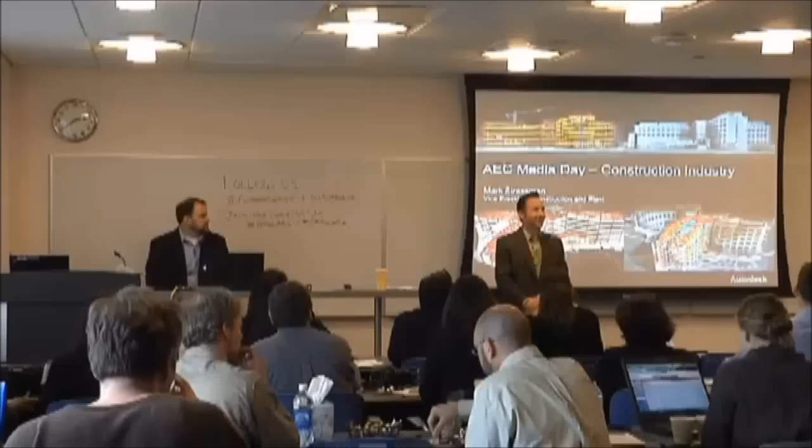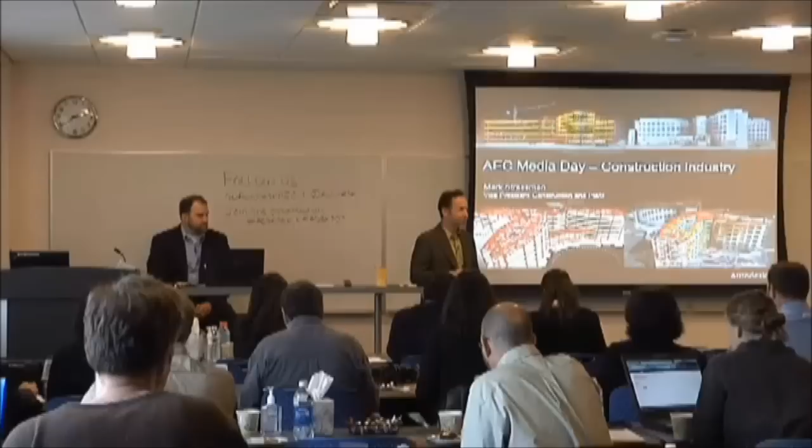Thanks, Brett. My name is Mark Strassman. I head up our plant and construction groups. Some of you know me from 8 or 9 years back when I was in charge of the AutoCAD business. 4 or 5 years ago, we broke off a separate group to focus on plant.

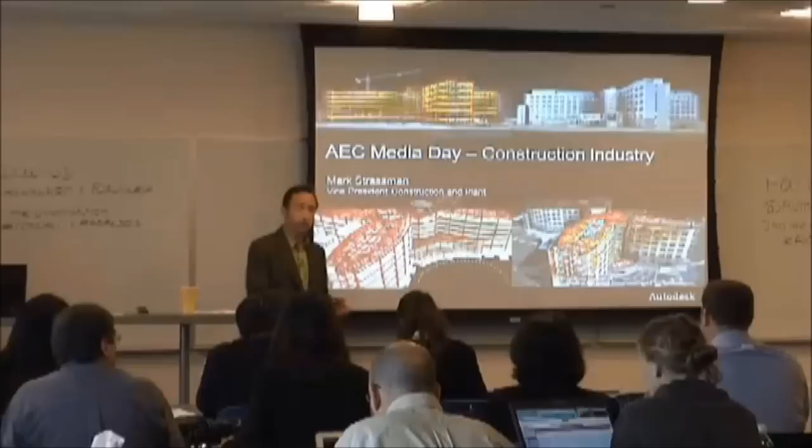Just this past year, we broke off a whole separate group to focus on construction. So not going to be talking about plant today. We're not launching the new 2012 plant products this quarter, but we'll be launching those soon and talk to you about those then. So today, focusing on construction. Also have Scott Johnson up here, who's going to be showing some of the products.

First, I want to talk a little bit about the construction market. You've heard about it today from Jay, you've heard about it from Jim, you're going to hear about it from me. I figure as you're heading down right before the sugar hits you, I'm going to get you as the sugar's rising before you plummet again for the end of the day. So, as you can tell, we're very serious about construction.

It's a really interesting market in a bunch of ways. It's a big market undergoing a lot of transformations, and there's a lot of new technologies really addressing some of these transformations. Construction accounts for about 10% of the world GDP. Just an enormous market, a lot of money being spent there.

At the same time, of that 10% of GDP, about 30% of construction costs are attributed to waste. That's just the way it is. It's the way construction jobs have been planned for a long time. The wrong materials show up at the wrong time, there are clashes, and you have to order different materials. Subcontractors sit on site waiting for materials to show up, and you have to change your whole schedule. So waste is just part of the process. But again, 10% of the world's economy, 30% of that is waste—a huge opportunity to get more productivity and more profits.

A big change going on now is contractors are really leading the value chain. It used to always start with designers, passed over the wall through engineers to the construction process. The recession has really changed a lot—consolidation, design-build firms. Contractors are now starting to raise bonds, fund these projects, public-private partnerships. So contractors are leading the value chain in a way they never did before, making this 30% waste particularly acute.

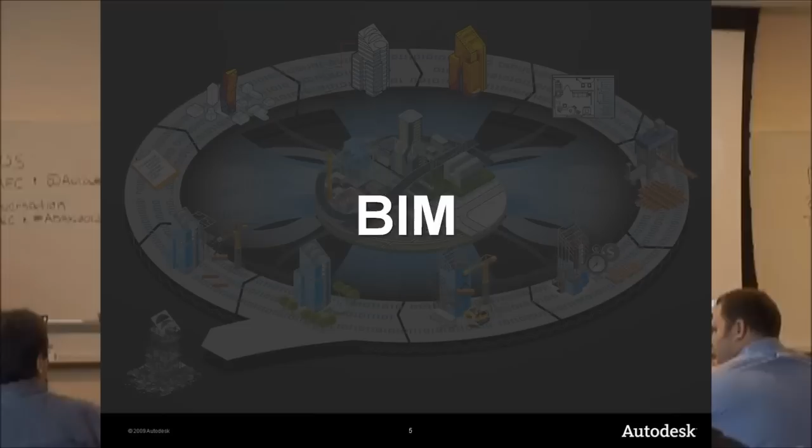That said, some technologies are really addressing this 30% waste in a way they haven't before. All day you've heard about BIM, the building information model. It's not just about design, it's about extending beyond design. The real beneficiaries of all this information in the building information model are the contractors. The cloud—having all this building information in the cloud, as opposed to trapped on a desktop or a server in someone's office—gives accessibility in the field to the contractor in a way they never have before.

And then mobile—every contractor in the field has a device. I met with a contractor a couple weeks ago. They said, I was on a job site, I needed to find information about a change going on in the project. One of my subs brought it up right on his device. We didn't have access to that—we had to go down to the shop, get our huge paper documents that weren't up to date, and it took an hour and a half to find it. We need access to the information in the field. So mobile devices, BIM, and the cloud give access to the things contractors care about in a way they've never had before.

What they really care about is cost, schedule, and constructability—how it all goes together. Schedule is what comes after what, how long it takes to build, and that all affects the cost. So BIM, cloud, and mobile allow access to all of these in a way they never have before. That's what we're really focused on.

This is really the mission of my group. It's about allowing contractors to win projects with a lot more predictability, cutting out the waste, and a lot less risk. I met with a contractor recently who said, you know why they call us contractors, right? I said, well, actually, no, I hadn't thought about it. They manage all the contracts to get the building built to reduce risk. So they really see themselves as risk mitigators, and BIM gives them insight into that.

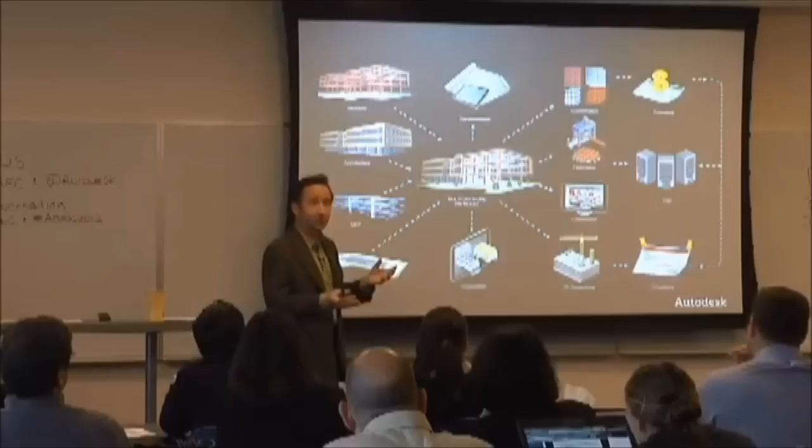So a bit of an eye chart here, but this is one way we look at BIM. You have structure, architecture, MEP, civil, all going into a multidisciplined BIM model. Out of that model, you can get your documentation, do visualization, do quantification, counting things in the model that can go into estimating systems. You can use that model for fabrication, choosing what areas you want to fabricate and go into a fabrication process. You can use it for coordination, how the different disciplines come together, where clashes are.

You can start doing 4D sequencing, time, what comes after what in the whole process. That can hook up to your scheduling systems, and all of this hooks into the back-end systems. Construction companies are more and more of a manufacturing process, so hooking into the ERP systems, knowing the specifications, the schedules, the materials.

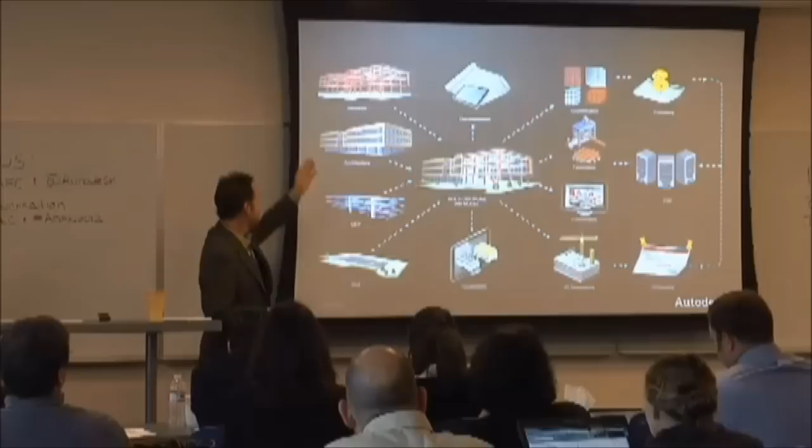It wasn't long ago that people really thought about Autodesk, especially in AEC, really as the design space, right? We have the design products for structure, for architecture, for MEP. And you saw today all of the new features in our various design products. Revit Architecture, Revit Structure, Revit MEP, Civil 3D, all the things they do to give more insight into the building process.

Several years ago, we introduced Navisworks, allowing customers to bring together all the different disciplines, not just from different Autodesk design tools but from dozens, supporting dozens of formats. From that, offering visualization out of Max.

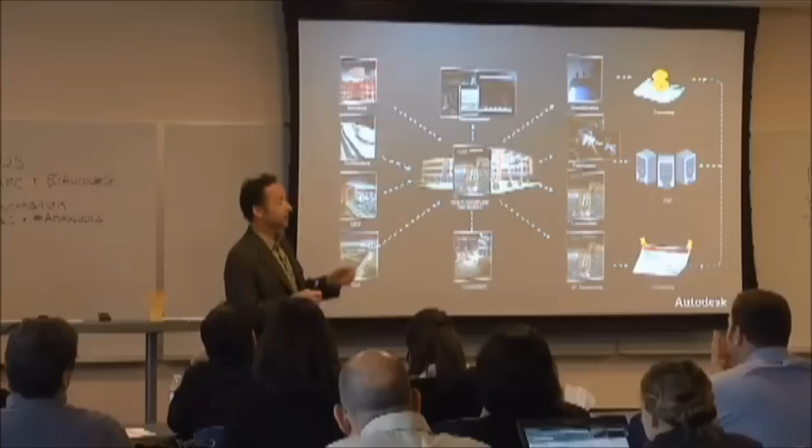Documentation. You saw today some looks at AutoCAD WS, so being able to, in the field, look at the 2D documents. Quantification. Last year we introduced Autodesk QTO, quantity takeoff, so counting things, hooking into estimation systems.

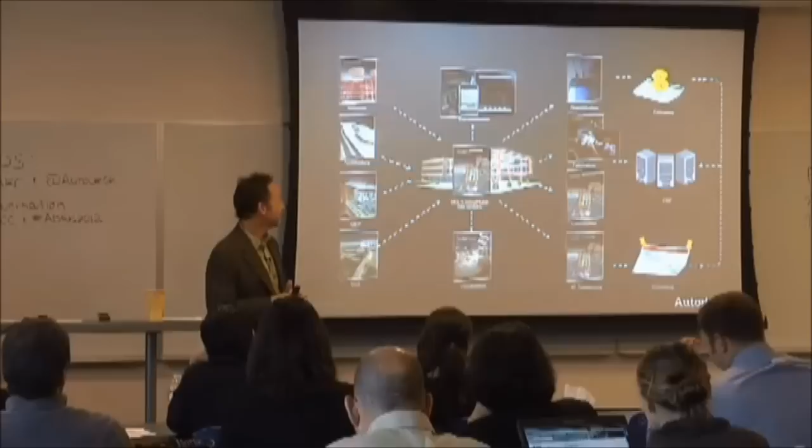We're seeing a lot of customers use Inventor for fabrication, and Inventor Publisher Mobile for on-site instructions on how things go together. Coordination and 4D sequencing also done in Navisworks. So this is really about, in construction, extending BIM beyond design.

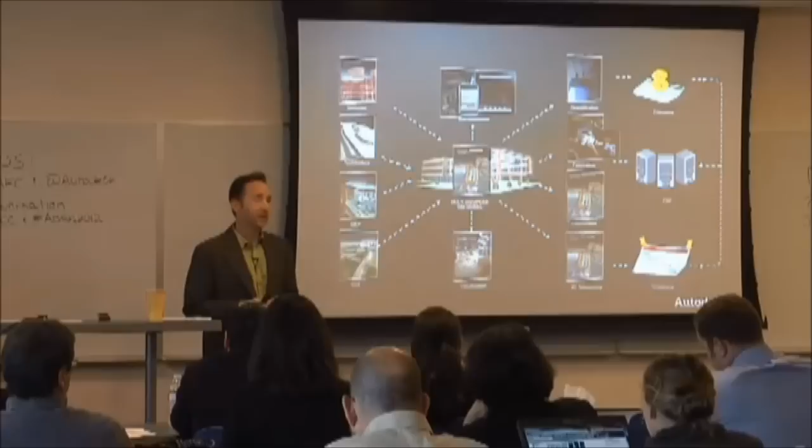We think we've got great design tools in this space, and we're really pushing BIM further and further there, but taking it beyond design. The contractors don't really care about the design. They care about the information and all the information they can get out of this model for quantification, fabrication, coordination, and so forth.

And guess what? All of these products, you knew you'd hear about suites again, right? They're all in the suite. So we have Navisworks Manage, AutoCAD, Revit Family. This is the ultimate suite that Jim showed you about, and this addresses all the different parts of the construction process.

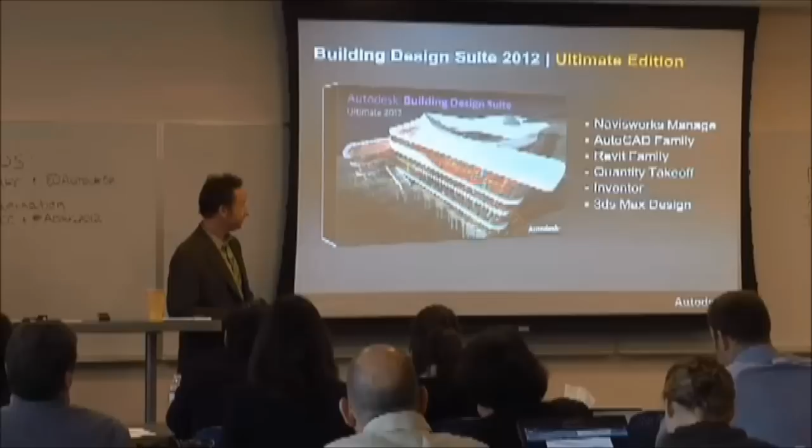Things that aren't in the suite that are part of the construction process include Vault, Buzzsaw, and Constructware for data management through construction management. All important parts of the process.

So given that, I'm going to go just a little bit overview about some of the features in some of these products, and then Scott is going to go and give you a full demo.

So construction modeling, you've heard about that a lot today. I heard about Revit with a division of objects and assemblies for greater level of detail for construction. The way the architect might design a model doesn't care about where the studs are or how many square feet of concrete you need. That's the sort of thing that the BIM groups and the contractors are starting to put this level of detail in there.

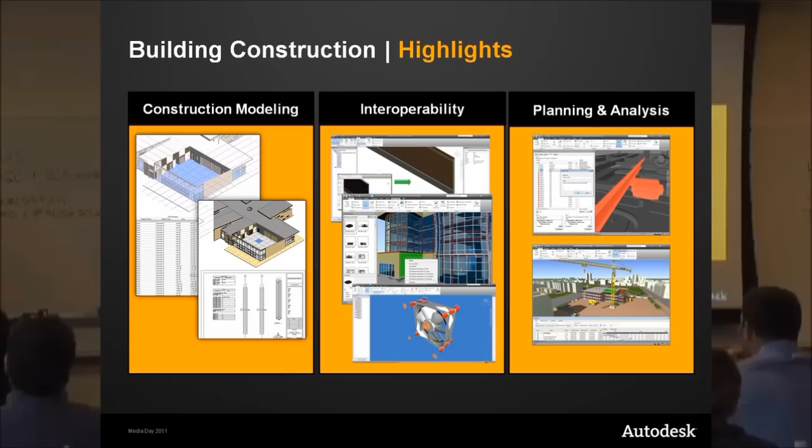In Navisworks, interoperability. Extended support for Revit. We have 2D DWF and FBX support. There's Vault support in Navisworks, and you'll see that interoperability as well. And then extended support for third parties, APIs, and so forth.

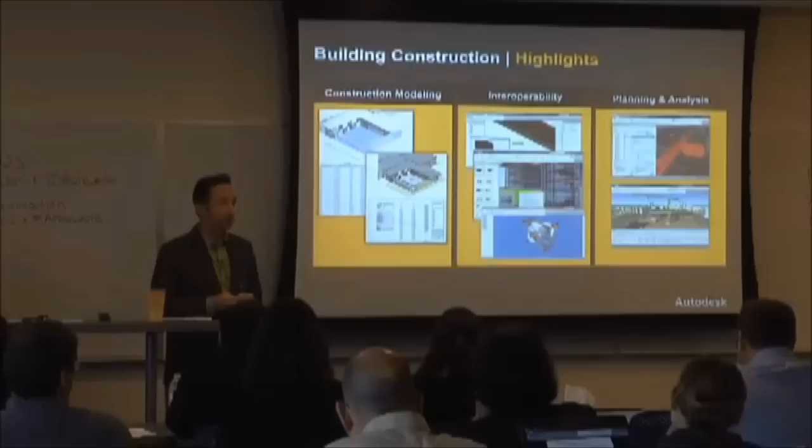On the planning and analysis side, we've done a lot of work on clash detection, the ability to report clash detection. Can do more Gantt charting, exporting out Excel spreadsheets to bring into various scheduling tools. Cost estimation, I'll show you some things we're doing in QTO.

Project management, really doubling down on Constructware and the things we're doing in Constructware, specifically making Constructware more applicable for BIM. So we have embedded the Navisworks viewer. You can do your clash reports, assign clashes to different users, a new feature in Navisworks, and then assign them and view them right here in Constructware.

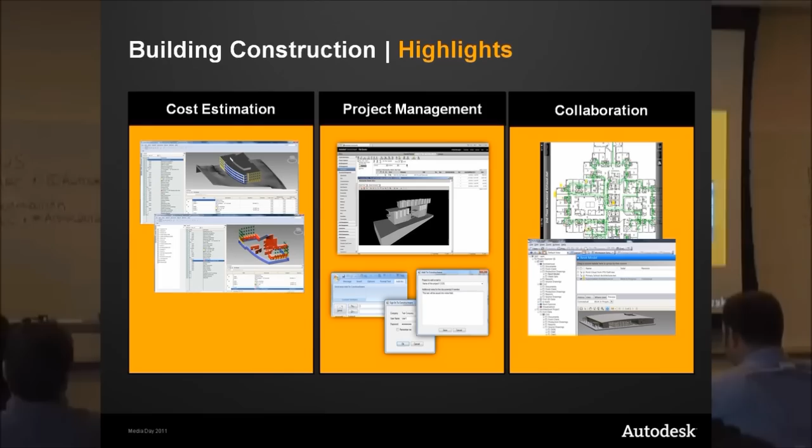Additionally, we added an API to Outlook, so we can integrate with Exchange servers. So when people are assigned tasks in Constructware, they can actually get emailed about it, fitting into their workflow, combining that 2D or even email-based workflow with a BIM model.

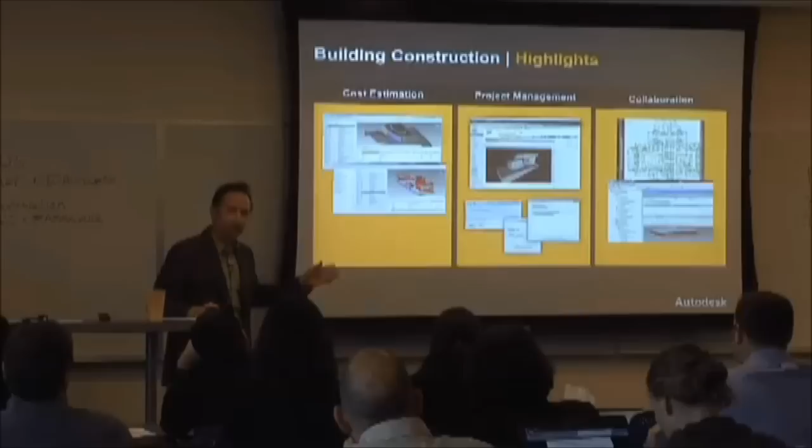And then collaboration. You heard about BIM 360. Integrating there and things we're doing across the collaboration to bring all these different parties from design through field into the construction process.

So with that, I want to introduce Scott Johnson. He'll show you all this great stuff. Thanks. Thanks, Mark.